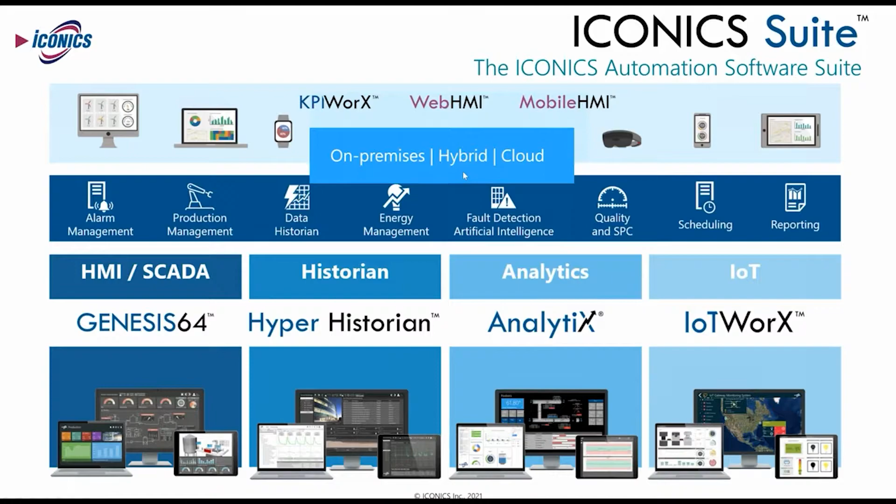And so you can run the ICONICS system. Generally, when we talk cloud, that means hybrid. That's a significant on-premises element. And we're going to talk in Morgan's example of how the cloud is used for a digital twin of the on-premises system.

So we use the software to develop applications across many different types of use cases, whether it be smart spaces, where we're trying to reduce energy costs, or field service, where we're looking at accelerating dispatch and working with the operators in the field to identify, fix, and repair and respond to equipment failures or anomalies. Around advanced visualization, whether that be in the plant or hands-free operation with mixed reality, remote monitoring.

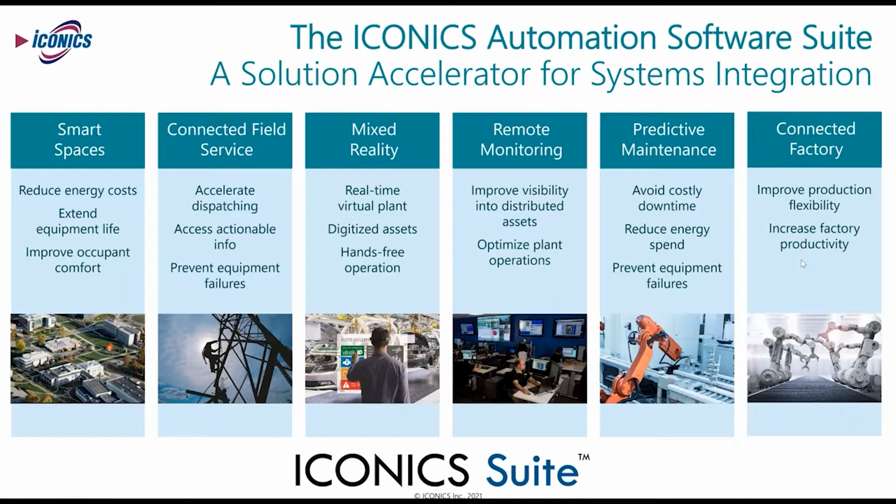So, most of the applications we have involve some kind of remote monitoring where we're taking data from remote systems and monitoring and or controlling around predictive maintenance and around the connected machines that are in the operation. And so when we think about this concept of digital twins in the context of whatever operation, we need to collect data from whatever those data sources are.

And ICONICS has a very flexible integration platform that works together with other cloud services, notably around the Microsoft Azure platform and Azure services, leveraging tools like the Azure IoT Hub, but also other data center environments, including other clouds like Amazon Web Services, where we're taking data and securely transporting it one way or another into the ICONICS suite.

We'll discuss the ICONICS edge technologies, but there are many ways of getting data, whether it's from mechatronics, the control systems that are sitting at the edge, or from informatics, either at the edge or other cloud-based information systems together in one system.

So why do people use digital twins? It's for the things we've talked about, right? Continuous monitoring, alarming, historical analysis to compare actual against set point or actual against actual. It's to increase efficiency, lower cost of ownership, to improve performance, reduce downtime, generally for faster responsiveness.

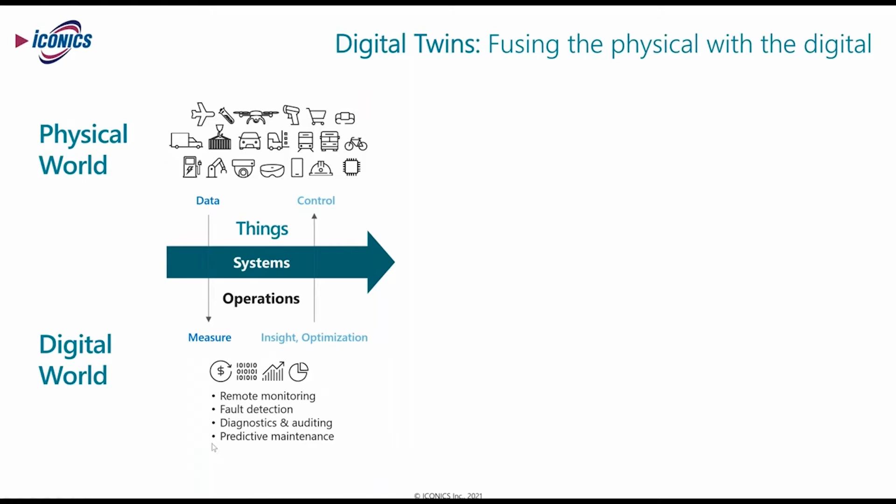The product lifecycle management or CAD systems, and then the digital twin of the telemetry, the actual data, the real-time data around those gets captured in the digital world for things like remote monitoring or fault detection or diagnostics and predictive maintenance. And if we relate the telemetry, the data coming from those things, to the places where those things operate, we can gather even more context and create more value for the operator and the users of the system.

So we may take where a specific element is being used. Obviously, there's a geometric element, there's a mapping element often, and then we look at other things. So we might look at analytics around flow or occupancy or space utilization or asset tracking, and we combine that with the elements of the people, right? So who is using it, how are they using it, and we get even richer context.

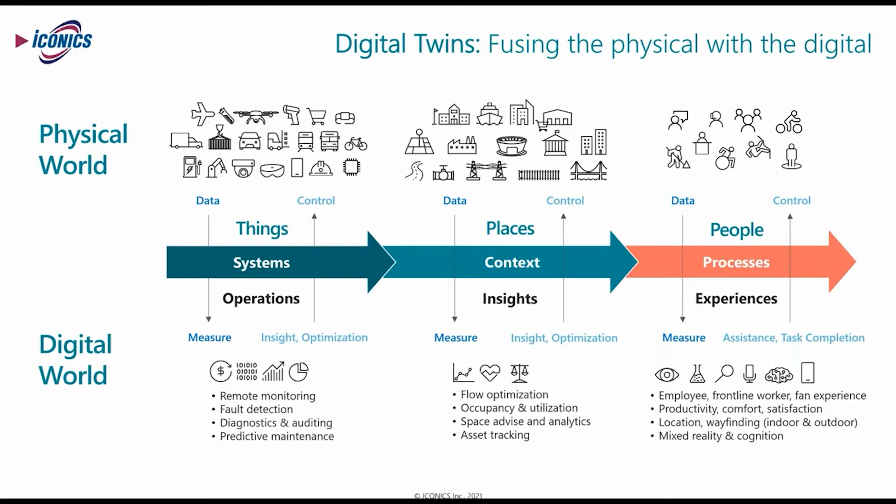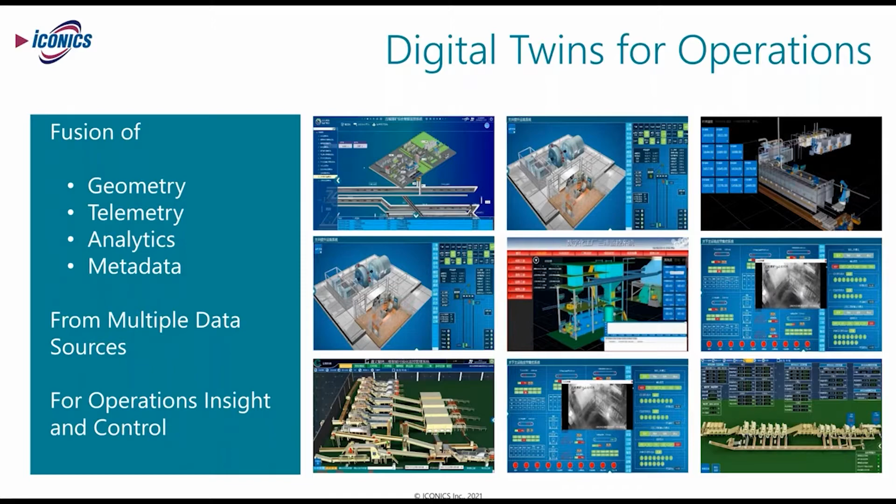So when we combine these elements with geometries that we describe in the product lifecycle management and analytics, then we have a human-machine interface, an operations control panel that allows us to act on that data in real time. And we do this by collecting the telemetry data and other management information system data coming from web services or databases and creating context, right?

So I can have a specific piece of equipment and I'll pick up elements like the speed, pressure, humidity, or temperature related to that asset, but also bring in the people and places, as we talked about, and other asset metadata. When was this acquired? What manufacturer? Where's the video for training, for operations? All of the asset metadata, and then we combine that together into a logical structure for the asset.

We call that element AssetWorX, this tool of creating an asset structure. Microsoft calls it Azure Digital Twins. And we see a whole large movement towards normalizing the asset structures. And so we'll see in Morgan's presentation how they've leveraged this organization methodology.

So we can take things like the geometries, the graphics around an object, and combine that with the digital twin of the data elements coming from the telemetry, and then we do simple things like create KPIs that measure rates of change and thresholds and targets, etc.

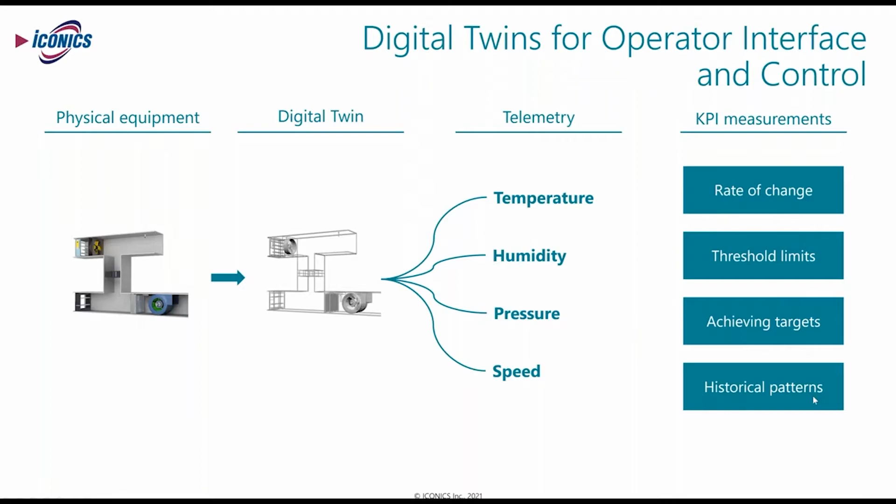As I mentioned, the ICONICS tool for digital twins is what we call AssetWorX. So AssetWorX is ICONICS' digital twin tool. It helps us to organize data, all that telemetry data from the Genesis 64 system. So this connects to any data coming from the outside world and also internal data from the alarm system, HyperHistorian, our own analytics.

It is a multi-level distributed type of system. AssetWorX is one of the core elements of Genesis 64. We can take multiple versions of Genesis 64, multiple AssetWorX catalogs, combine them. These can be dozens. They can be distributed however logically it makes sense, and they can run on premises and or in the cloud. And of course, we integrate the alarms and the historical data. Using this methodology, we can scale to millions and billions of data points together in one data catalog.

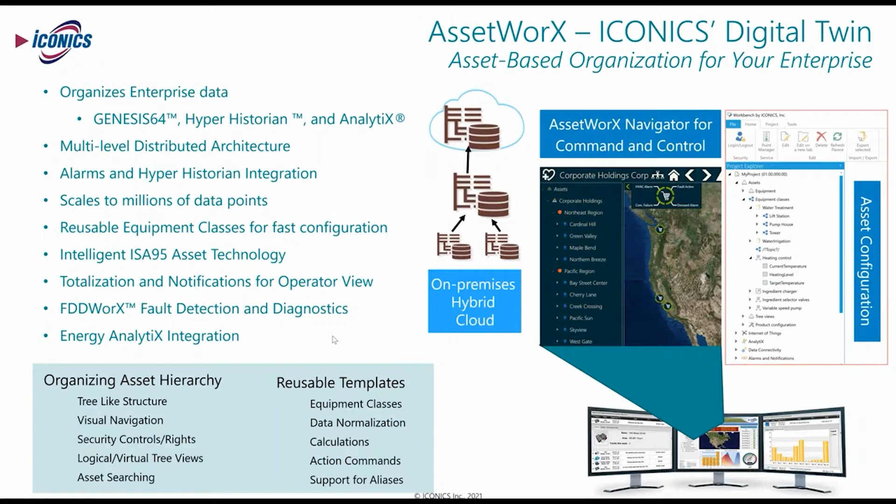We introduced the concept of reusable equipment classes to describe specific pieces of equipment. It follows, of course, a very logical asset structure like we see described in ISA 95. We have the ability to do totalizations and notifications and alarms within the visual element within AssetWorX. So we call this Asset Navigator, and to have actions that are performed on the screen. And of course, we integrate other analytics.

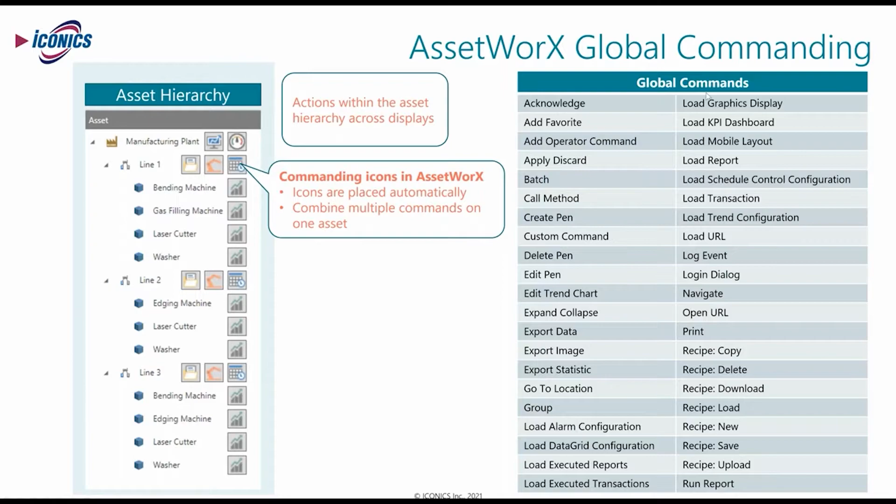So I mentioned the ability to create actions from the visual element. We call this our Asset Navigator. Within the Asset Navigator, we can add icons, we can add alarm status, we can change colors, and these things can be animated, and then we can click scriptless actions, so commanding here, and so you see a large number of commands.

Right, so I mentioned the historical data. ICONICS has an enterprise historian we call HyperHistorian. It also has a distributed architecture, and you'll see in the project that Morgan is going to talk about a use of a distributed data collector, and that has the ability to connect to a wide variety of data, particularly leveraging OPC-UA, but BACnet, SNMP, web services, MQTT, all of these, including offline data. So we bring data in, we log the data, have a distributed logger methodology, including redundancy, and then of course we have to visualize that data.

We would normally do that in GraphWorX 64, part of Genesis 64, but also that data is exposed to other services, including Azure Data Lakes and Power BI and any other analytics application, Hadoop, etc. And then we have advanced performance calculations with a library of built-in statistical functions that make it an advanced historian, and with pre-configured tools like Energy and SPC and OEE.

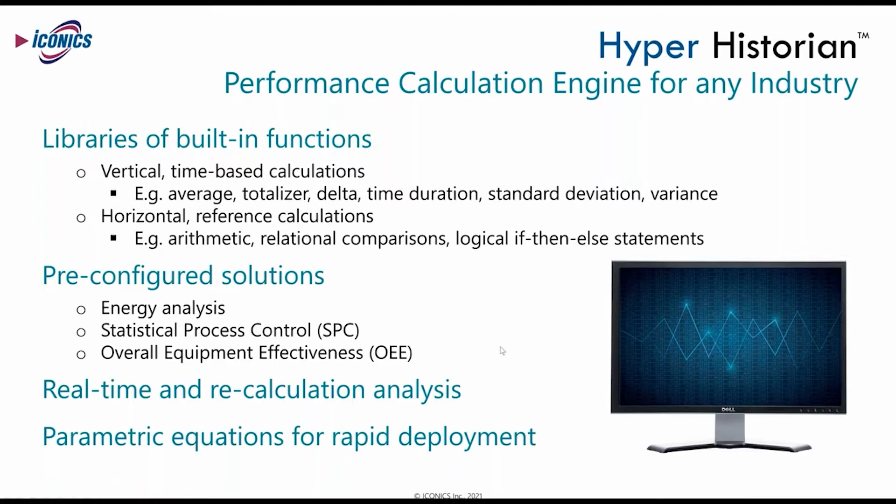How do you get the data securely from the edge? There's a number of ways to do that. ICONICS has an edge platform we call IoTWorX. It includes the ability to collect, historize, analyze, and visualize data, and then securely transmit that to the ICONICS suite or to other applications leveraging AMQP, MQTT, REST, and HTTPS. We use a trusted platform module and X.509 TLS security from IoTWorX.

But the basic idea, you have to get that data into the digital twin, and then you can do your visualization and operations control and management. With that, I'd like to switch to Morgan to talk about a real example of how all of these tools can be used to accelerate a system for real operations. And I think, Morgan, you're going to show an example of how SOAP Engineering has done this. So with that, I'm going to pass the screen to Morgan.

Right. Thank you very much, Mark. So today I'm going to go over a specific case study, but to get started, let me just give you a little bit of an introduction to my company. So I work with SOAP Engineering. We are turnkey system integrators. We do everything from instrumentation, PLC controls, to HMI and SCADA automation. Over the past 5 years, we've worked on multiple projects working with IoT implementations and also a lot of cloud hosting of the servers. We are based in Houston, Texas, and we do have offices worldwide.

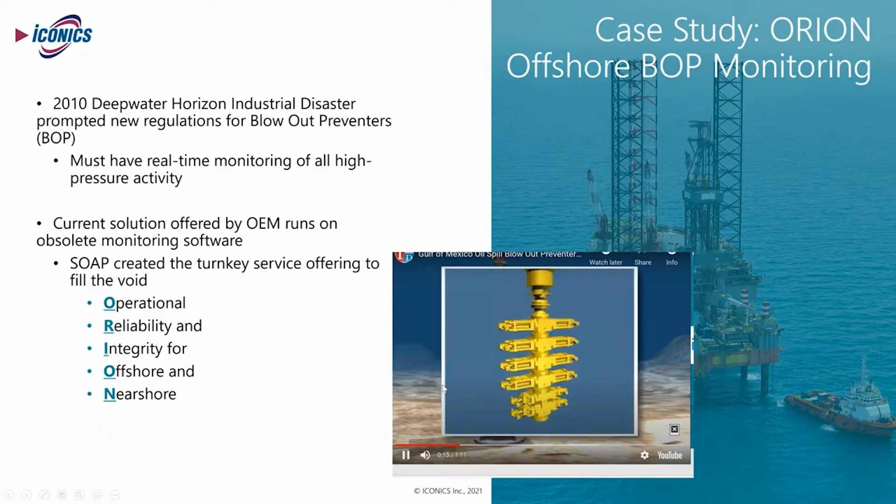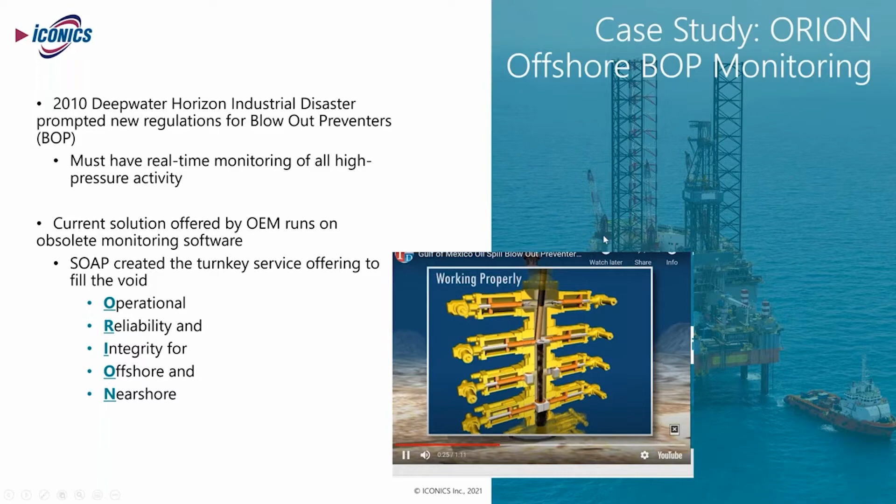So today's case study is going to focus on offshore blowout preventer monitoring. I'm sure you are familiar with the Deepwater Horizon disaster that occurred in 2010. This was a failure of the blowout preventer. So in the video I'm showing here, it's just showing you this blowout preventer. It's the piece of equipment that sits on the ocean floor that regulates the pressure of the fluid coming from the ocean floor up into the rig or vessel. So here it has a system to regulate that pressure, and it also has a cutoff so that it can stop the flow and prevent that fluid from going up to the rig or the vessel. So during this disaster, that is the piece of equipment that failed.

So since then, there have been a lot of different government regulations that have been put in place. And for this case study, it's really about real-time monitoring requirements for all of the high pressure activity, which means the data being read for this blowout preventer has to be sent back on shore as long as they are actively drilling. So this regulation is important that they're in compliance. And it's also important for safety because it is a big safety risk if this piece of equipment is not working properly.

So when SOAP learned about this situation, they found that there are manufacturers that have different versions of this physical piece of hardware for the blowout preventer. And as they've delivered these different versions throughout the past 10 years, they have also delivered monitoring software that meets the compliance requirements to bring that data back on shore. Unfortunately, a lot of those solutions for their older versions of this equipment have obsolete hardware and software that they're running on. So what SOAP has done is created a turnkey solution that will replace the monitoring system for these BOPs. It's for monitoring as well as for maintenance calculations to let them know when certain components need to be replaced. So the solution we've created is called ORION. It stands for Operational Reliability and Integrity for Offshore and Nearshore.

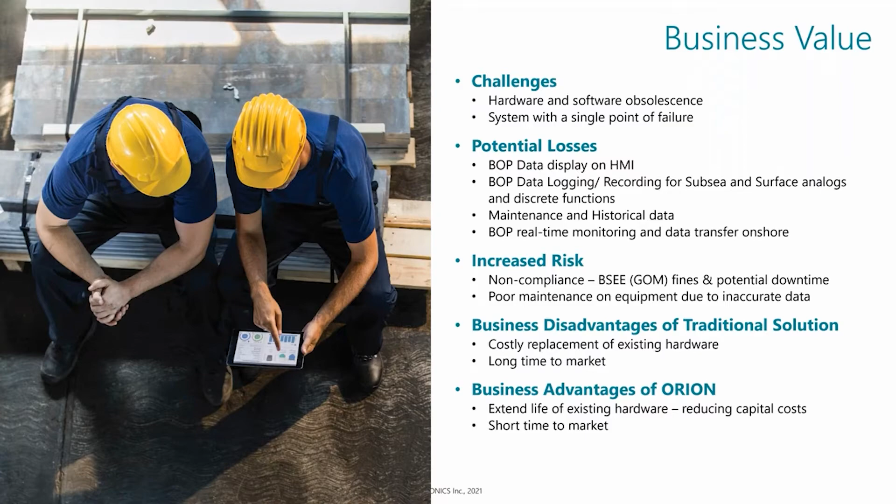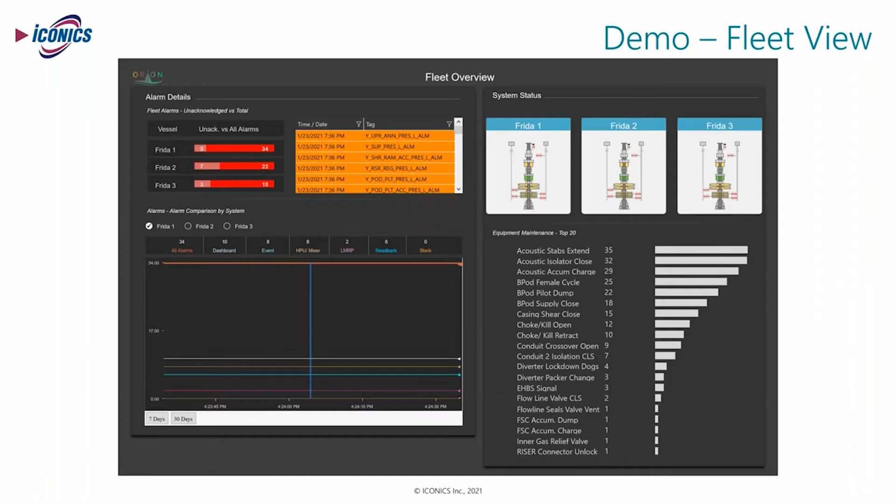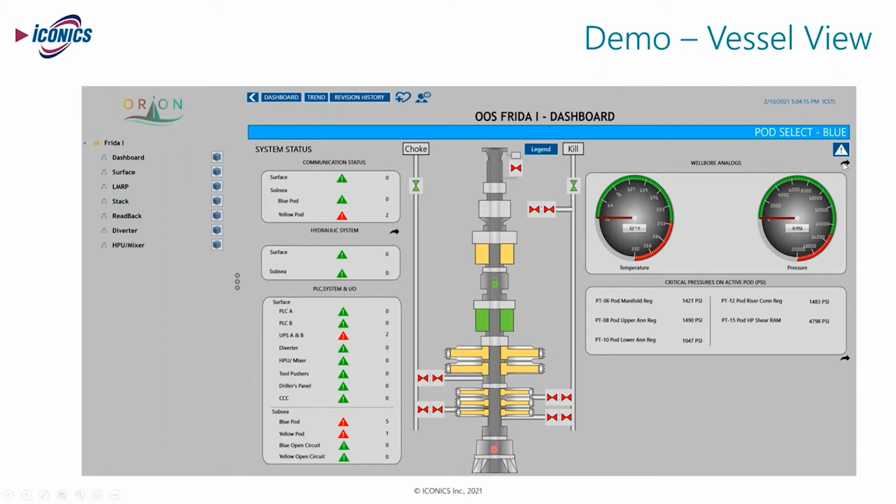I also can, from this main screen, navigate by clicking one of the black arrows, and this will take me to a screen here. This one is just comparing different values, and this one would allow for trending. So on the blowout preventer, there is redundancy with a component called the pod. So this is just showing the differences between those two redundant units. So the blue version versus the yellow version.

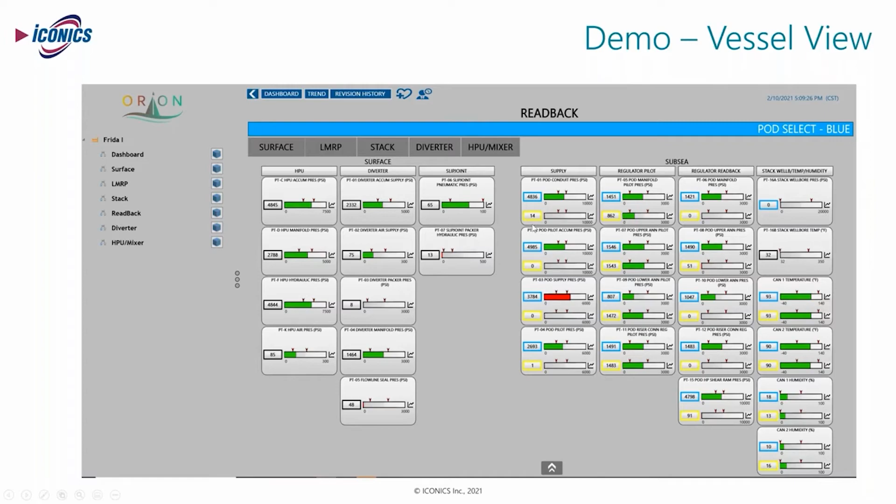And then I also can look at one of the panel screens. So here, this panel screen is showing the status of all of these different components for the equipment on the surface of the unit. The nice thing about this screen is that this is the same screen I would see on the vessel or the same screen I would see remotely as well, if I was accessing the remote system. So this gives the ability for operations staff on the vessel to have support from the people that are back on shore for troubleshooting or performance optimization as well.

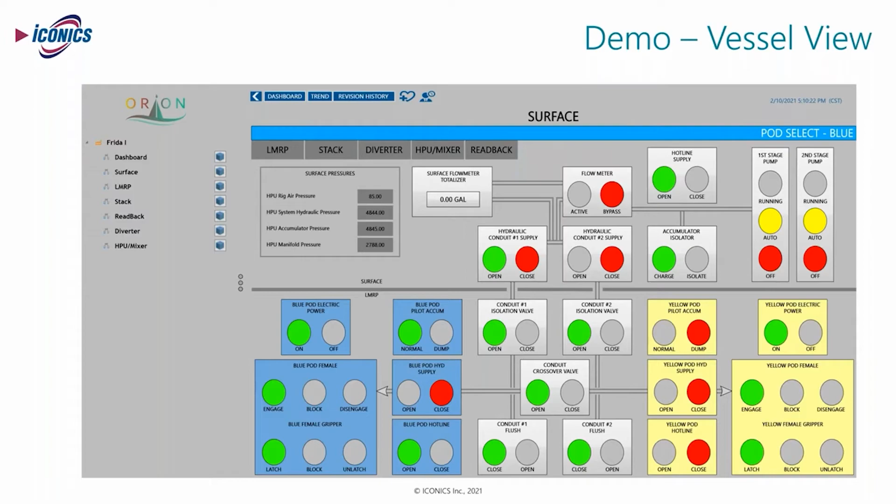Thanks very much. Really appreciate, Morgan, that excellent presentation, all the perspective that you've given, how these tools can be applied, of course, to blowout preventers, a really critical function, to any oil and gas, offshore, onshore, or really to any kind of distributed asset-based model that needs a digital twin in the cloud.

Of course, we provide technical support under our SupportWorX program to our systems integrators and end users, and we have pre-sales solution help for our systems integrators to help them with architectures and presentations. And to also assist our systems integrators, we have our own specialized professional services group to help with those unique aspects around architecture, consulting, design, specialty training, that sort of thing.

And so SOAP Engineering is a member of the ICONICS Systems Integrator program. They're a gold certified systems integrator. Getting started is easy. We have a registered systems integrator, no cost program, and then people enroll to get access to more services. And we recognize our systems integrators as certified and gold certified based on their skills and experience.